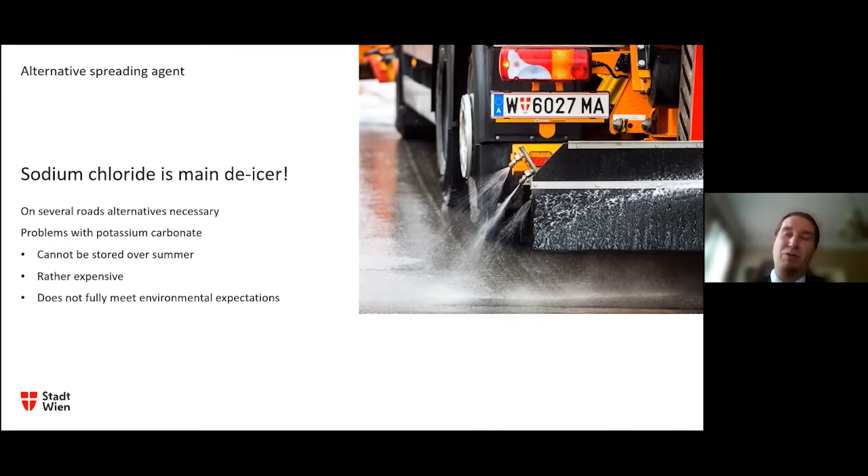So let's start. Sodium chloride is still the main de-icer we use, but there are several roads that need an alternative. Up until now, we still use potassium carbonate in dry form, and this is very impractical in some cases. You can't store it over summer, it's quite expensive, and it doesn't fully meet environmental expectations. So what we were looking for, this is one of the new spreaders, the liquid brine sprayer, and we were looking for something we can use with this sprayer. It has to be liquid, and as we're going from solid to liquid, we were looking for alternatives.

So we asked Vienna University of Technology to cooperate with us, and they did this as a diploma thesis. The project's goals were to find an alternative to potassium carbonate, to analyze the market and examine suitability, and to check the effectiveness of the product independently, because often you get products with big claims by the producer, but in the end they can't meet these expectations. It hasn't been the goal to replace salt or brine, because we knew this wouldn't happen. If we find something, okay, but we already knew we probably wouldn't find an alternative, and that's been true.

So what's been tested in the laboratory was thawing performance. We selected different spreading agents, and the first step of this project was to look at the market, what's up there, what can you use. There's been around 20 to 25 products. Then we said, okay, let's pick some of them and do further testing with these selected products.

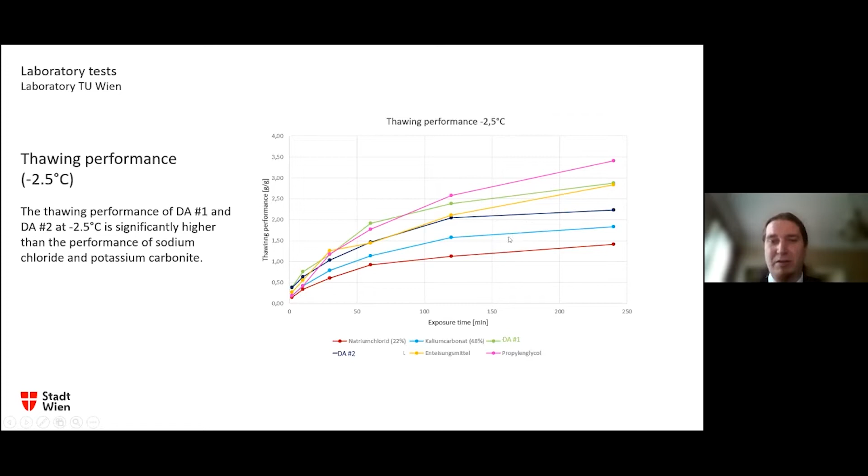The one graph showed only minus 2.5 degrees, which is a rather common temperature in Vienna for winter, but we tested it down to minus 10 degrees Celsius. You can see the lower the temperature gets, the less the difference between these two spreading agents becomes. After 2 minutes, 10 minutes, 30 minutes exposure, it's starting to thaw most of it within the first hour. Depending on temperature, within 30 minutes the difference is not so big. Afterwards, it becomes bigger, of course.

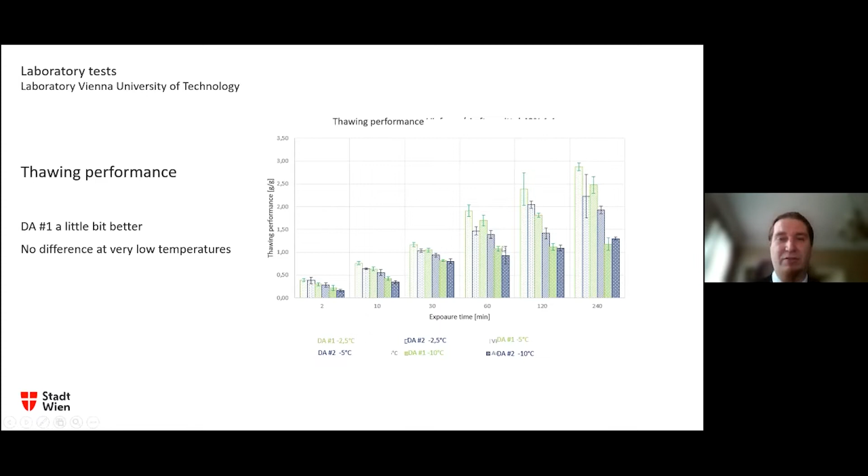So we know that it's working very good at the temperatures we have a lot. We also know that it works at very low temperatures, which can happen in Vienna - we might get minus 10, minus 12 degrees. So it might happen, and it works there also. Not that good, but of course sodium chloride is also not that good at these low temperatures.

Another thing we wanted to test before we spread it out on the road was the skid resistance, or the friction of the road. Does the spreading of these de-icing agents have a negative effect on the skid resistance of the road? This is a problem because we know from previous tests that there are de-icing agents that cause slipperiness just by spreading them out.

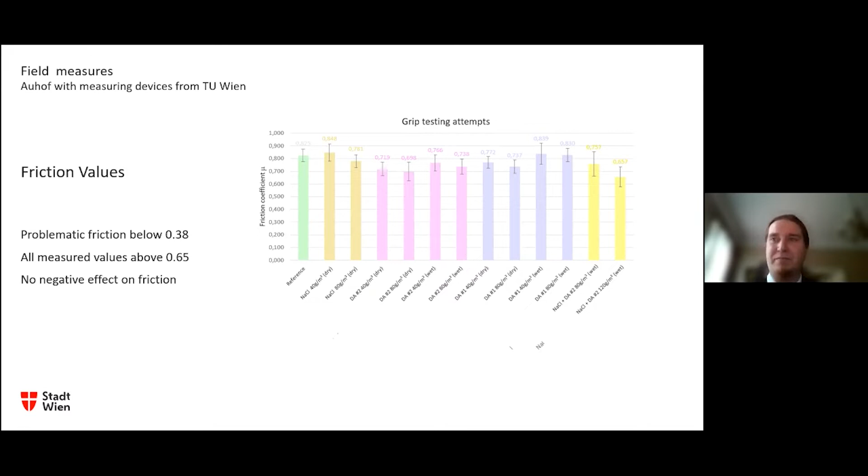What we started then, or the final conclusion of the tests from the laboratory, was: thawing performance is good, freezing point is good, friction is good, but price is rather expensive compared to all the alternatives we could find. For the environmental stuff, we couldn't test it because testing for environmental issues is rather hard, so we just used what we got from the producers, and some were good or others had no data, so we're not sure about all of this.

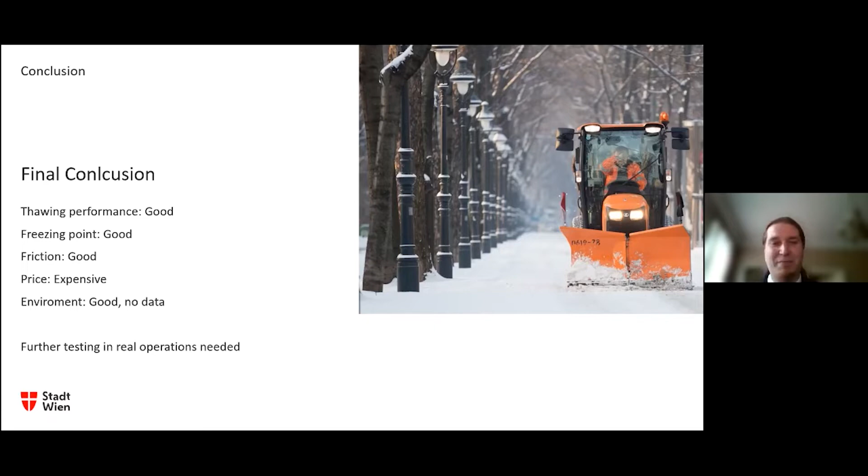But in conclusion, we tried it out on the road and it worked last winter. So we had our first tests in the real world, it worked there, but we still need further testing in real operations. We had some problems getting the de-icing agent in time last year due to a Corona lockdown, and they weren't allowed to travel into Austria. So this was a problem for us. We couldn't get enough material, but we sure hope that we will get enough chances this winter to test it out on the road as well. So thank you for your attention, and I hope I could show you how we try to find new alternatives. Thank you.

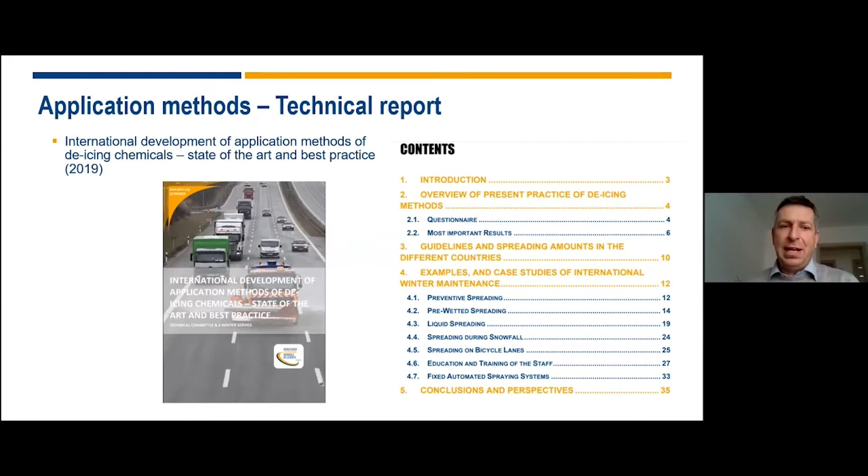We are looking for effective and reliable cars, of course low cost, which is quite hard to find, as the service maintenance costs are getting higher and higher for us, since we are not able to make self repairs as it was in the past. On the other hand, for the drivers, the comfort has been improved radically. Of course we have new technologies, we must add things like AdBlue tanks and so on. So very shortly, we are quite lucky that investments came into the technique for winter service.

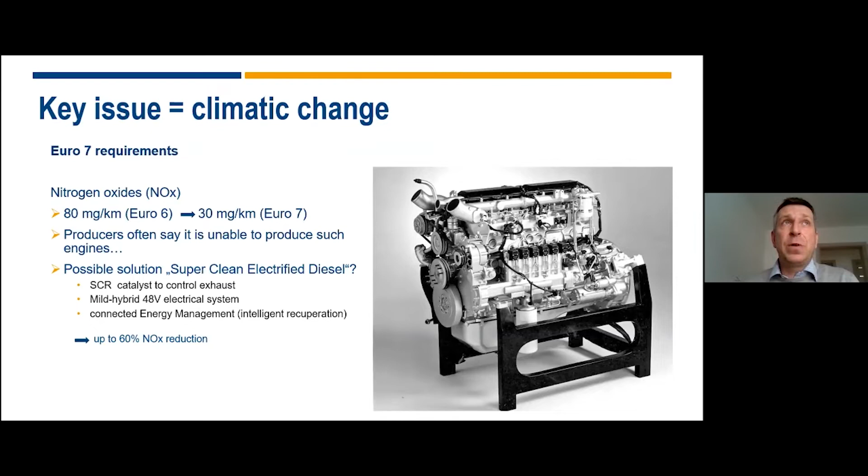And we are quite hard fighting with the environmental offices, as they don't allow us to use salt or any other de-icing materials, with the exception of potassium carbonate, which is used somewhere. This is what our agency solves at the moment now. And of course, it's got something to do with economic efficiency as well.

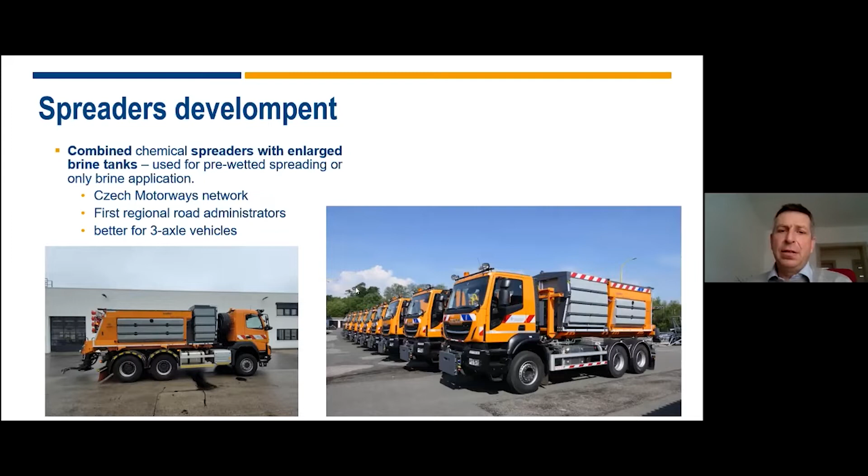We know that it's better to use them on 3-axle vehicles, as the capacity is bigger. The spreaders are divided into two parts, one for solid salt, and the second for the brine, and the ratio is usually half and half. It can even be more brine, up to 6,000 liters.

And they are very good with the working parameters. As you can see here, the spray width up to 11 meters is good for the motorways as well. There are two different parts of the Jet or the Spratronic system. And even more important for us is also the speed. We can use it up to 90 kilometers per hour. It was not so usual in the past.

Brine dosage, it's quite clear. We have good controllers for the drivers, so they really can check and control the measures of the brine and of the salt. So this is one of the things that we are quite lucky to bring to our roads.

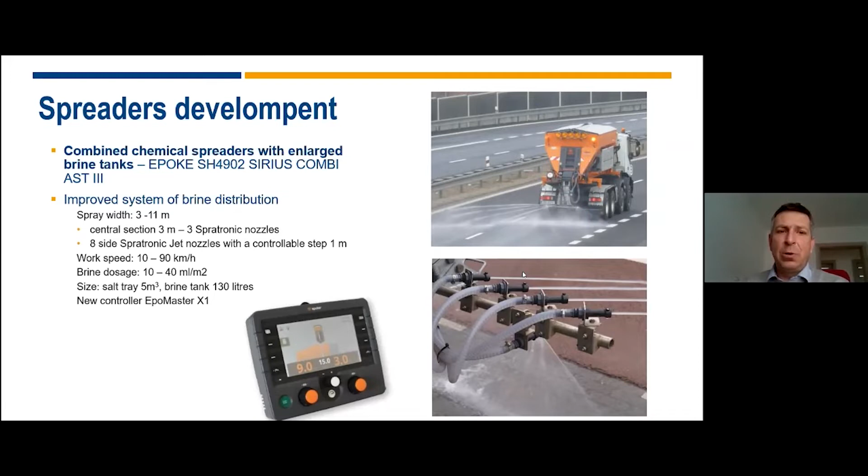Anyway, generally we are focused on flexibility of the trucks. I mean, they must be used all over the year. One car must be able to carry different superstructures - I mean water tanks, so sweepers in summer, and of course these spreaders in winter - and the exchange of the bodies must be very fast, must be flexible. This is what we really need from the cars.

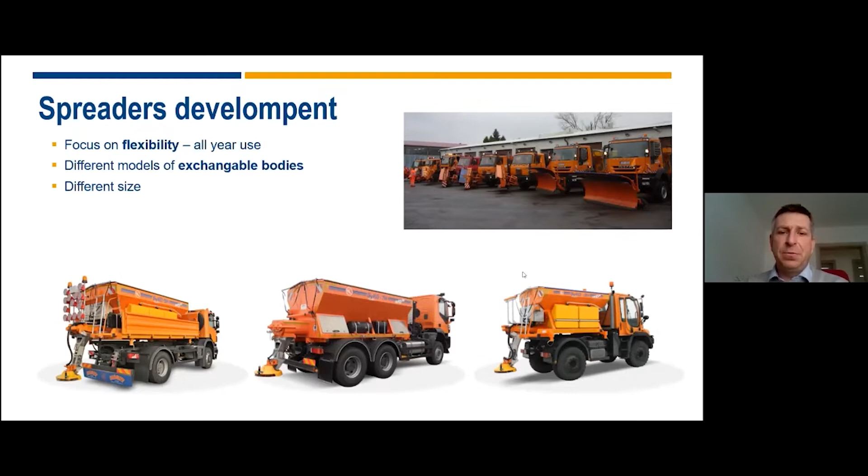I have a second part of my presentation, something different, and it's got something to do with Ukraine, which is my favorite country, and we have many friends there. It comes from history, from our relations with especially the Western Ukrainian regions.

We still have good and official relationships there, and one thing that we do is instead of throwing our older technique to the wrecking yard or somewhere else, we send it to our friends in Ukraine, and they are quite lucky to have it, even though this is older technique from the 90s or even the 80s. It's in good condition. It's very robust, very easy to repair, and it's not very sophisticated, but on the other hand, each driver, or almost each driver, is able to repair it on the road.

And we have this agreement that we can send them to our friends and they use them there. I hope that they are still in service.

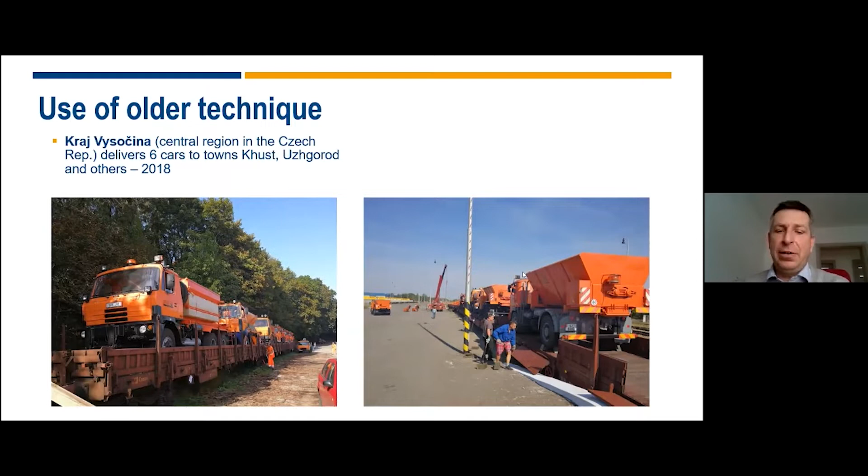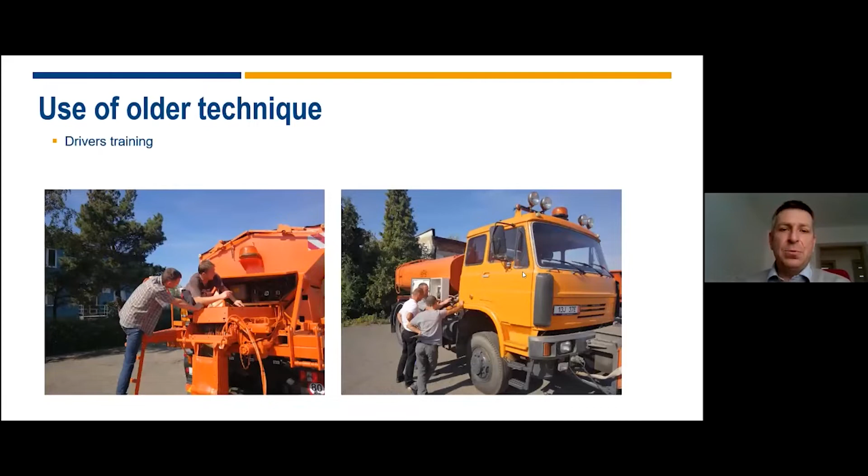We made some driver training. So I got for each car one of my drivers, and guys from Ukraine came as well. It was a good meeting there. And these are pictures - the right one is from Khust, it's definite.

The left one perhaps from Uzhgorod, I'm not sure, but they are in service there. And a similar thing has been done later from the South Bohemian region, 2 cars to Kolochava, which is again a town close to our history. It's not about some gifts, but I think it's about friendship. I'm glad to know people in Ukraine, and they are really good friends for us. They come quite regularly, and I hope that it will go on.

So I got, we have 3 minutes after half 2. 2:30, so I got the time okay. If any questions come to me, I'm ready to answer.

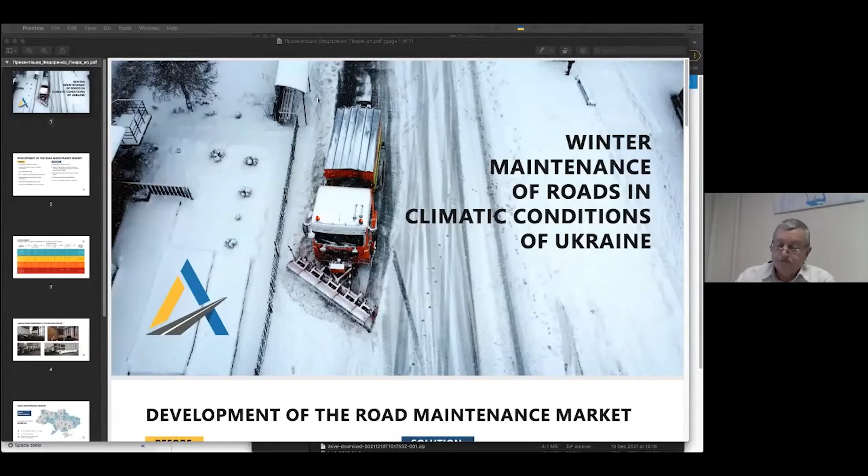Due to the program of the Great State Construction, new cement and concrete roads were built. The calculations were done by a Ukrainian institution to show that cement and concrete roads turn out to be 40% more efficient compared to pavement with asphalt. On the 5th year of operation, roads with asphalt require their first fixing, while cement and concrete roads need fixing only on the 20th year of exploitation.

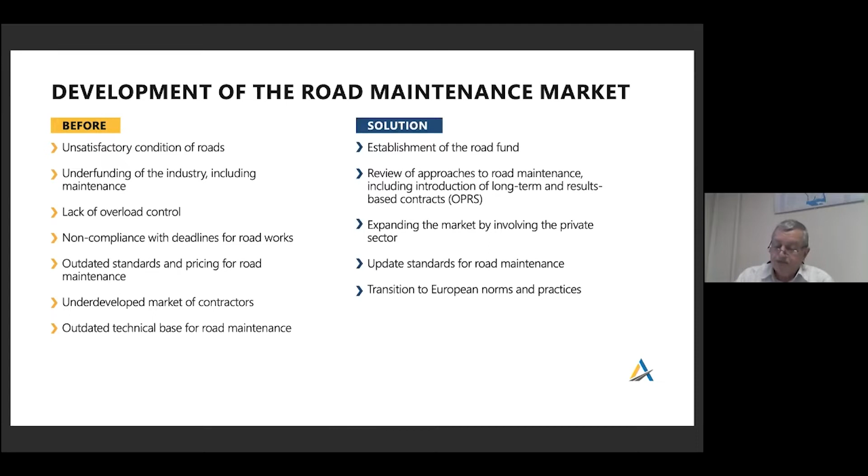So it's lighter during the winter time and has better traction, and so the braking distance is shorter. So we have new roads.

This is why we don't use abrasives. We only use saline solutions. We have recommendations by the National Research Institute from 2019. However, they are very controversial. On page 5, there's a description of de-icers. It says that de-icers can be used, including inhibited chloride anti-icing materials.

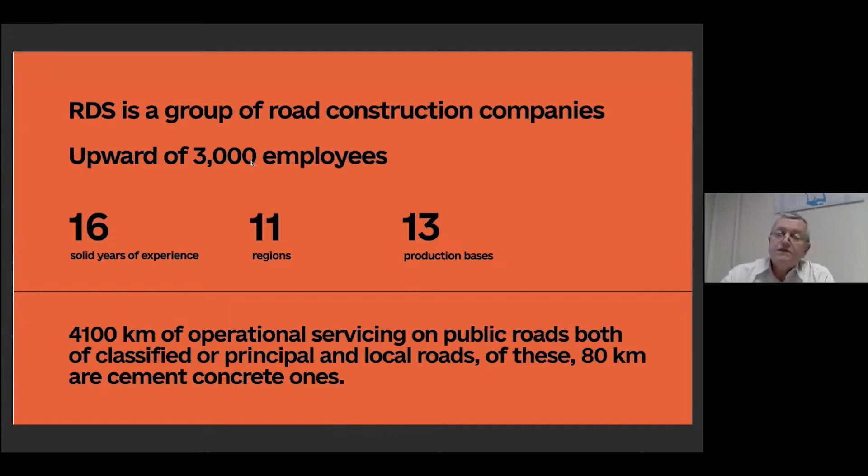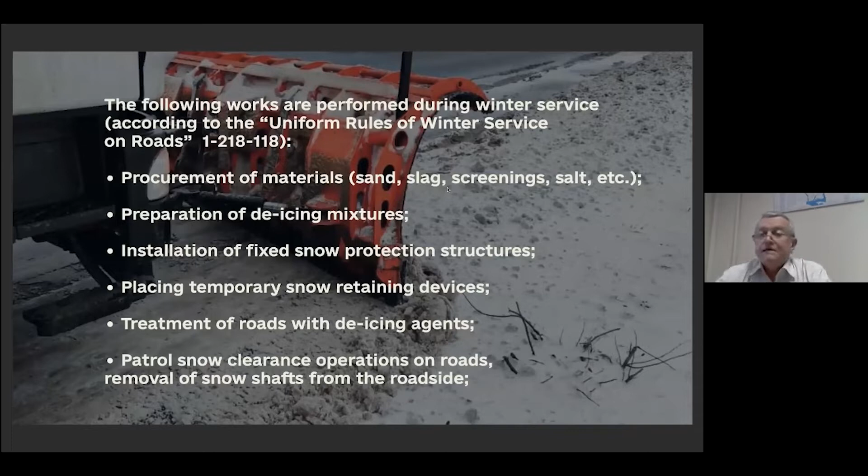Another issue I have is related to additional tracks from the fields leading onto the roads — additional roads that lead to the fields. Right now we have conflicts with different agricultural companies who take their produce from dirt roads onto the M15 motor road, and we spend a lot of time cleaning it from silt and dirt. So I have issues with that.

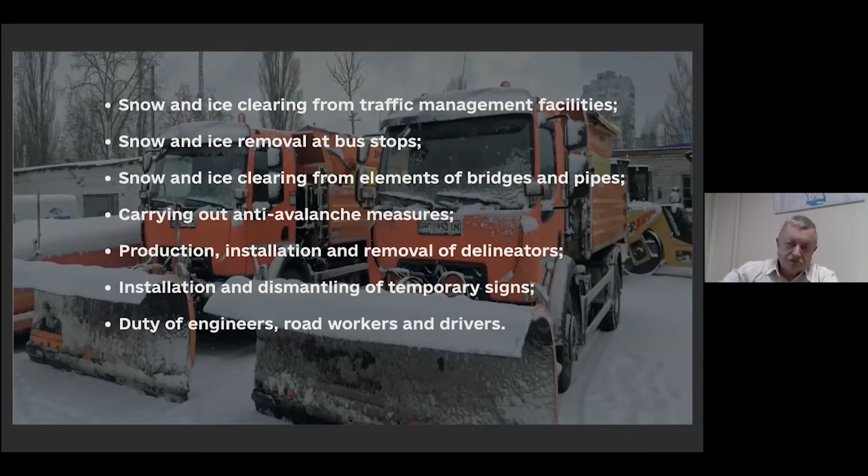So I have questions for Ukravtodor and the Ministry of Transportation. They need to insist that farmers actually place hard pavement on the dirt roads for the first 100 meters of the roads that lead into the fields. This will help prevent dirt from getting onto the motor roads of national importance. This is very important for Ukraine in general. Thank you very much for your attention.

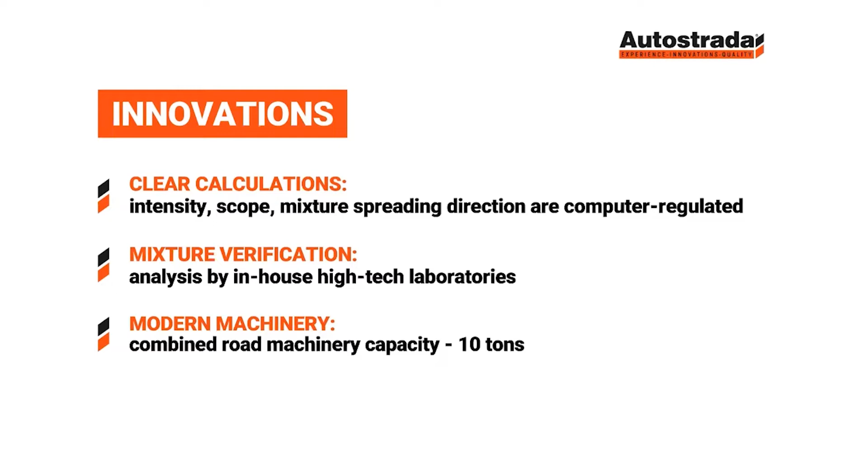Of course, our goal is the result we're trying to attain as we maintain the roads. The good result for us is safe traffic. We can use different technologies of de-icing, like saline solutions and chemical reagents, which can extend the time and effectiveness. However, we work within strict regulations, and our capability to test new technologies is not that big. So one important factor for us is making sure our fleet is sufficient for proper performance.

Currently we have over 60 units for winter maintenance. All of our trucks are either Ford or MAN trucks, and the de-icing agent spreaders are usually of Polish or Turkish manufacturing. Currently we service international traffic routes and regional traffic routes - those are the contracts that we have currently.

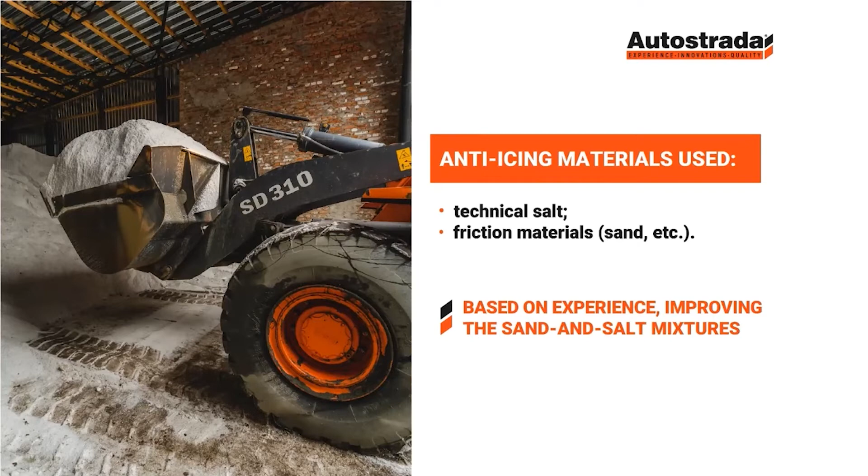Things we would like to change or see new in the winter maintenance system revolve around two things. First is transition to longer term contracts of winter maintenance, which will help us plan with higher efficiency and effectiveness in the long-term horizon. When we understand the long-term horizon, we know how to buy machinery and modernize the storage bases and such. The second thing is, for us, it would be nice to have implementation of build and maintain, where the road building company is responsible for maintaining the strip of road it has built. As we build the roads, we provide a guarantee for the pavement, and we're really sure of the high quality of the pavement. However, if maintenance is not done at a proper quality level, this will lead to lack of timely repairs because the company is not responsible for the road. So where the same company is responsible both for maintenance and construction, this will improve the quality of roads, which will provide higher convenience and safer traffic at any time of the year.

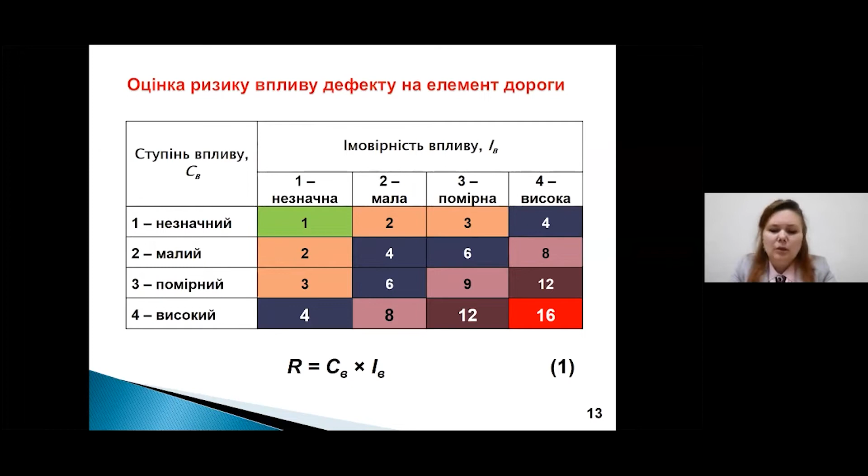A new notion was introduced: the risk of the defect impact on the element of the road. So it is now determined for each element of the road. The priority for defect remediation is given to the defects that impact the safety of traffic.

For us, this is also a principally new category, which in principle is already available in the foreign experience.

As already said, the levels of motor road maintenance were classified under the levels of maintenance. The main classification does not contradict our regulatory framework and is contained in the acting state standards and provisions in Ukraine.

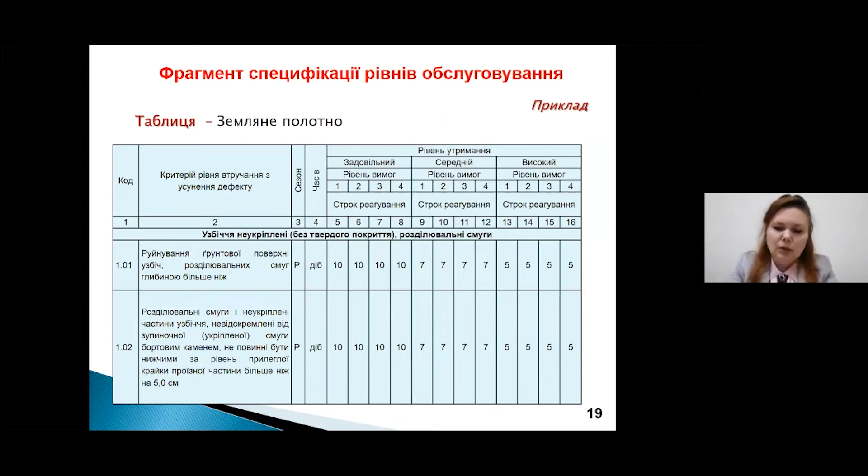Parameters for the OPRCs under these state standards that were developed, adopted, and implemented include the full set: the composition and the length of section, the duration of the agreement, and the maintenance level, expected cost of procurement, and daily fixed sum.

Sums for works that are going to be carried out once the OPRC is established, and the number of penalty scores for exceeding the deadlines under the OPRC, and also the cost of one penalty score that is applied for failure to keep the level of the road.

Therefore, the types of long-term agreements were established. This is a comprehensive OPRC that includes all of the scope of relations, and specialized OPRCs, for example, for a certain section or for a certain element of a motor road.

Also, the subject matter of OPRCs was classified into two classes. The first class is the section of one motor road or sections of several motor roads, which is the network approach, so to speak.

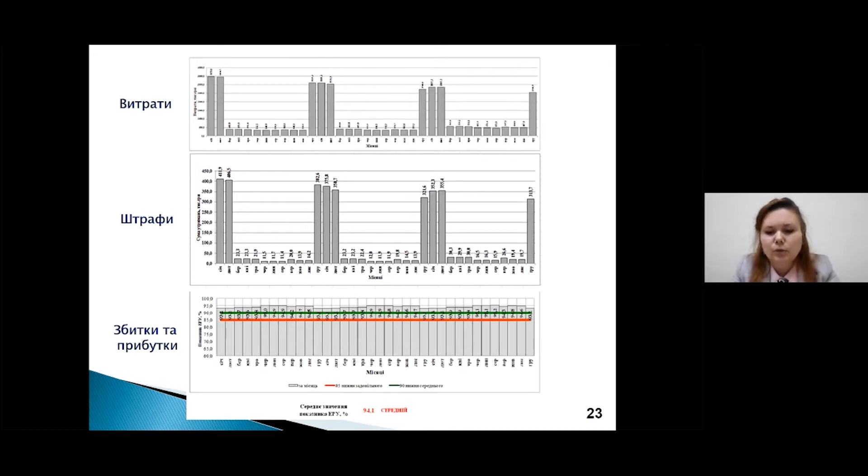Here we see that according to the results of modeling, we can approximately forecast what these expenses, possible penalties, profits, and expenses are going to be, according to the levels of maintenance.

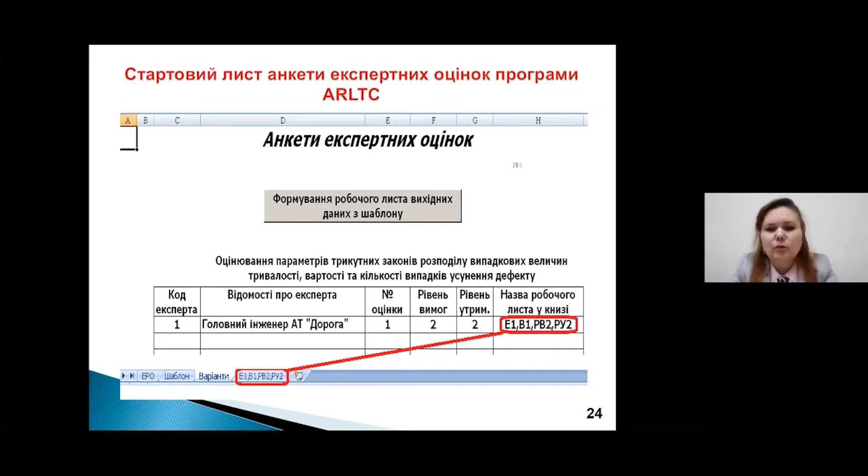The expert evaluation from experience allows determining the level of requirements at certain sections by means of questioning the experts who were carrying out the works at this particular road section. Therefore, we carried out the modeling, and as a result we have 3 regulatory documents for our sphere of economics, and we plan for the future to work towards substantiation and the draft of OPRC according to the long-term principle that is based on performance.

Thank you for your attention. I am open to answering any questions that you might have. Thank you.

Thank you, Professor, you're right on time. For those of our listeners who are not familiar with Ukraine, let me add that OPRC contracts are pretty rare and new to Ukraine. We only have one case of such a contract being used, by the Lviv road agency in the western part of the country. This contract has ended recently, and we are now in the process of prolonging it. But it is of utmost importance to the Ukrainian government to set up the legal framework for these contracts to be implemented on a regular basis across the country on all types of roads.

If there are no questions, let me pass the microphone to Stanislav Gvozdikov, who is Deputy Director of the Scientific Road Institute. This is the institution that deals with standards in the road sector, where it also provides research and all the relevant scientific work associated with roads and their maintenance. So please, Stanislav.

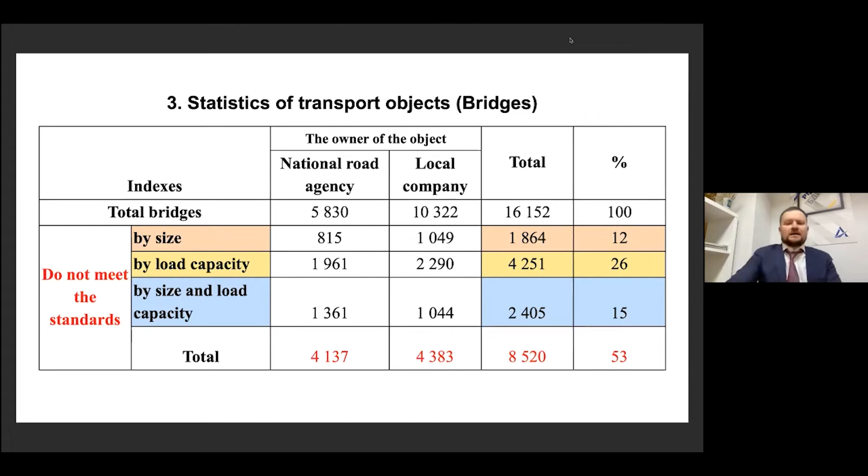So Ukraine has the highest cost per kilometer of maintenance. This is a personal conclusion, because many times we irrationally use the available money from the budget only to be able to sustain and expand the service time of highly degraded infrastructure objects.

Let's go to the next slide. This slide contains information that I wish to share with my honorable colleagues, whose ideas and recommendations will be noted and used in daily work, because we, the Ministry of Infrastructure, have the task of greatest liberalization of the market, and so we need to promote new players of road construction to come to the market.

We need to increase the competition capability of the infrastructure product. We need to implement world renowned practices for complex infrastructure projects. I'm talking about EPC plus F methods of work, implementation of a project implementation scheme where you design, build, and operate. Using this Gold Book in the changes in the legislative base, everything related to making these goals practically attainable will be very important for us.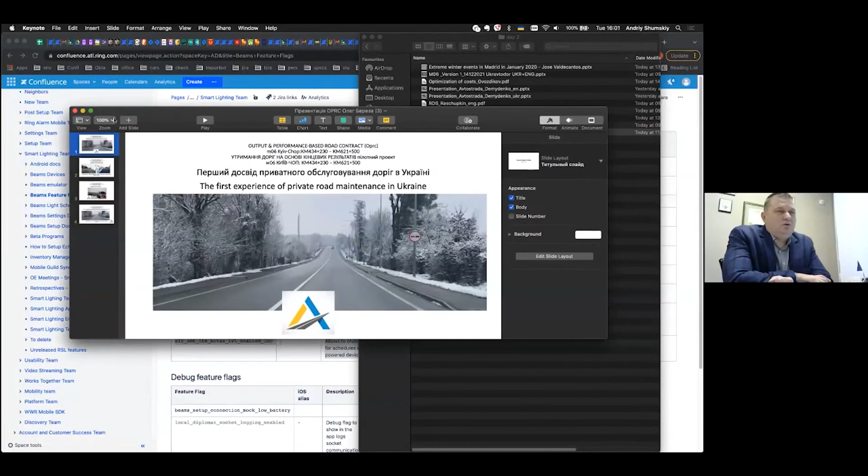So in 2014, from the Lviv and Rivne border to Stry, we had zero serious changes. And this road, based just on the protocol of servicing that was enacted to implement this contract, we were able to maintain. I believe it will be serviced until those changes with regard to the M06 road are enacted.

I think it will still remain in very good condition. This part of the road, M06, is one of the arteries both for Lviv region and for Ukraine in general, since it connects the utmost western borders and the center of Ukraine. For us, it was a high priority to keep this road in well-serviced condition.

Definitely, we had paid great attention to the challenges related to servicing. And so this contract of attracting a foreign company, including the engineering company, had actually turned out to be a very fruitful company.

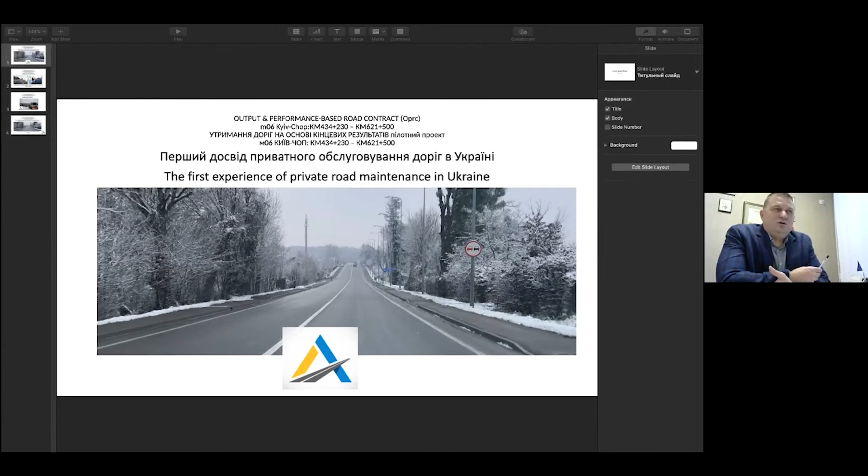They were performing the technical supervision, and it was very important as well. So this was the third involved party that was helping the mutual responsibility of all parties. So the client was laying down the rules, and the engineer was actually supervising, and the maintenance was done by the contracting company.

So it was very important for us to see what was happening with regard to payments. The payments were evenly distributed, but the result had to be maintained on high levels. So the functions were very important for us to understand what we are aiming to achieve.

This is why the engineering company and their role was crucial. They were performing supervision, and then, if necessary, actually penalizing the company. So therefore, we obtained a very good result, regardless of the weather conditions.

So we had, sometimes even in preventive ways, performed measures necessary to maintain the road at a good condition. It was specifically related to winter maintenance, because this region of the country is very susceptible to changes of weather, where from the Carpathians we have different abrupt weather changes, and so it has played a very big importance.

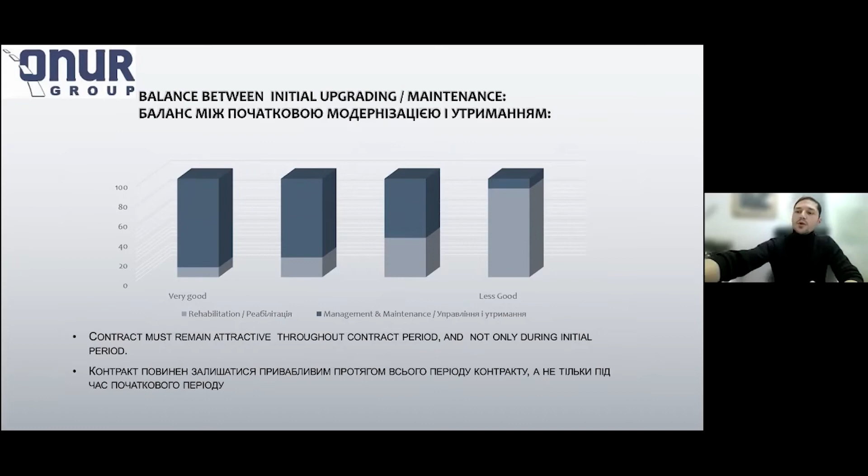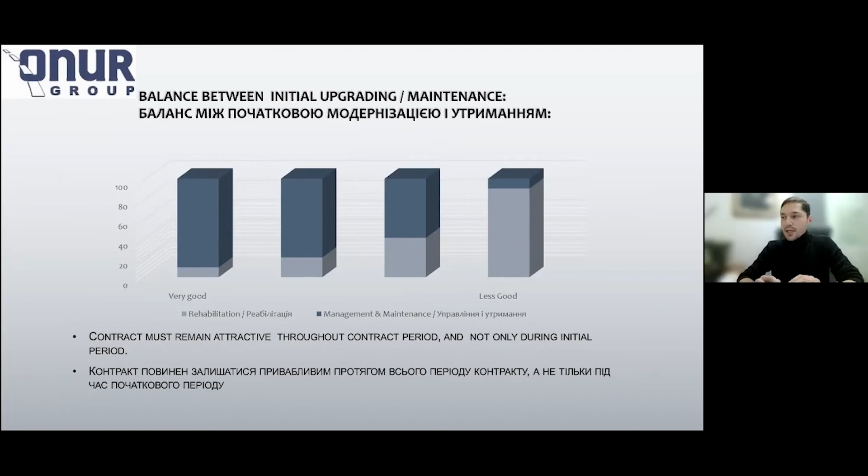As you can see on the presentation, if the rehabilitation works are not big, the management cost is really big. If the rehabilitation works are more than 60-70%, the management and maintenance cost is really low.

Let me talk about service levels and specification. Specifications included in the contract describe a level of service expected for the road. The road should work, that's our main idea. Level of service is defined in terms of usability, travel speeds, road surface conditions, safety features, roadside assistance, etc. The contractor has to ensure that road users get a certain level of service.

Service levels are set for the following: road open to traffic, emergency incident response. For every accident, the contractor goes to the accident site and does all the works needed. Road pavement, unpaved shoulders, drainage system, road signs, road marking, safety barriers, highway lighting, traffic lights, landscaping, cleanliness of surface, bus stops and road toilets, and structures.

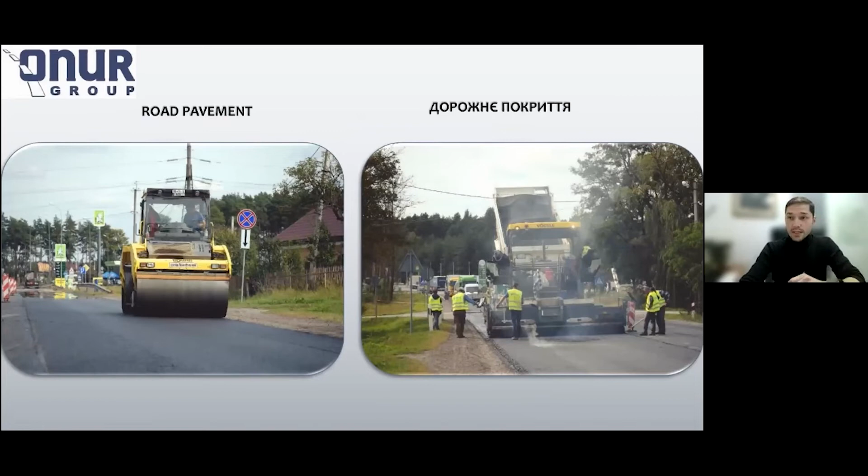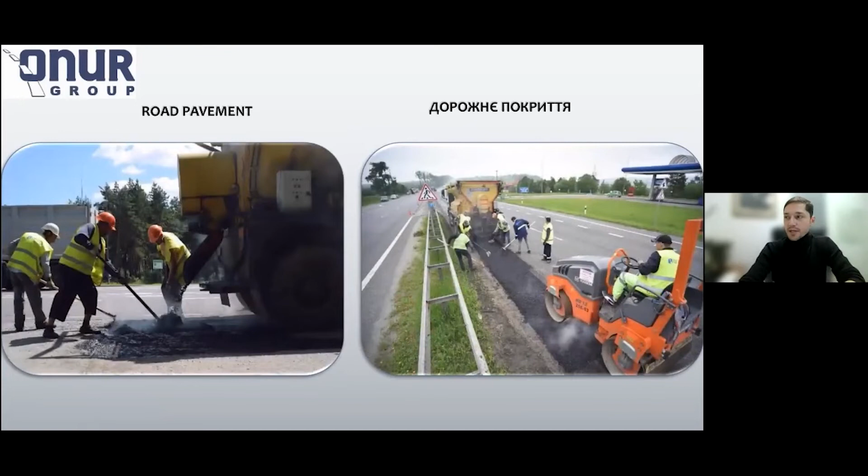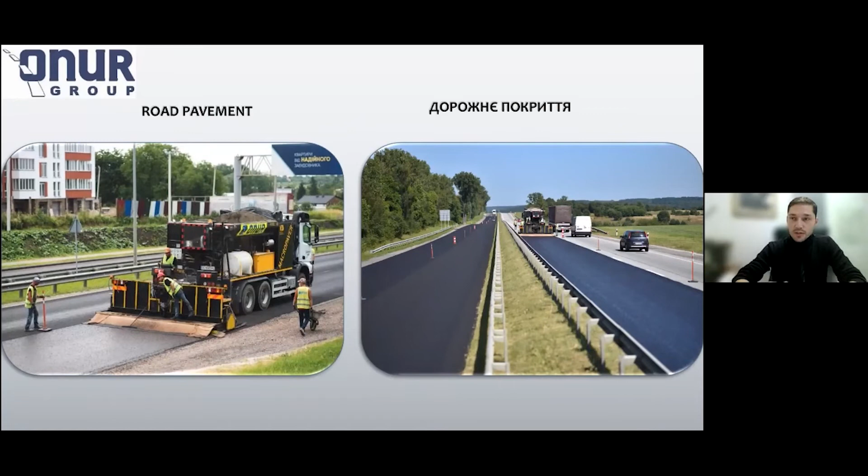The first and second year of our contract, we made a lot of improvements and rehabilitation works, like crack sealing works, patch repairing, slurry seal, and microsurfacing pavement. It is really a new technology for us—not new technology in general, but the M06 was the first place where we did it, using special techniques and special technicals.

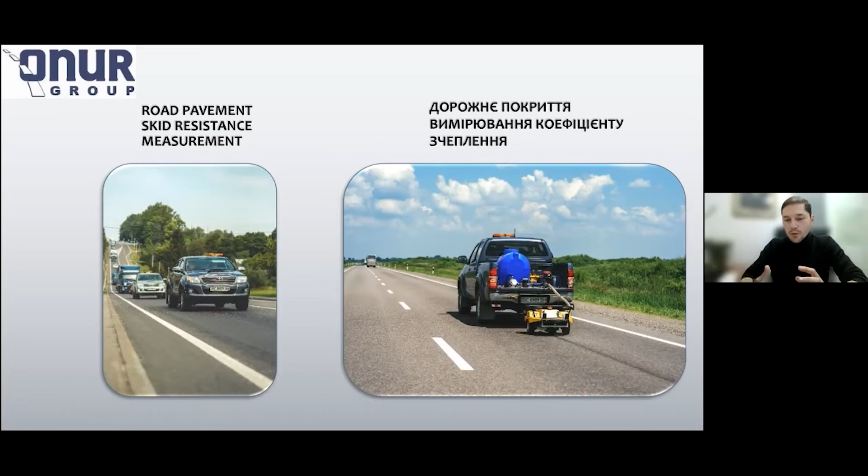Also, I want to add road pavement skid resistance. We made skid resistance measurements every year, two times a year. After this skid resistance measurement, we decide where we will do improvement and rehabilitation works, or slurry seal works with pavement. As you can see, this is the special equipment for the skid resistance measurement.

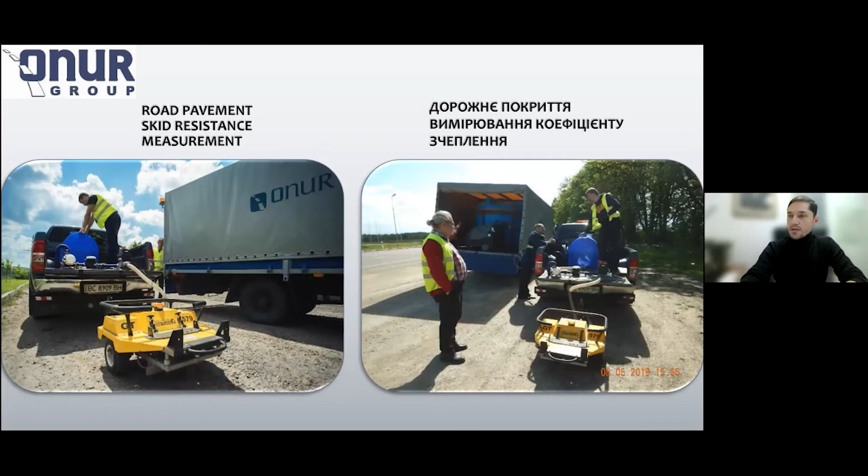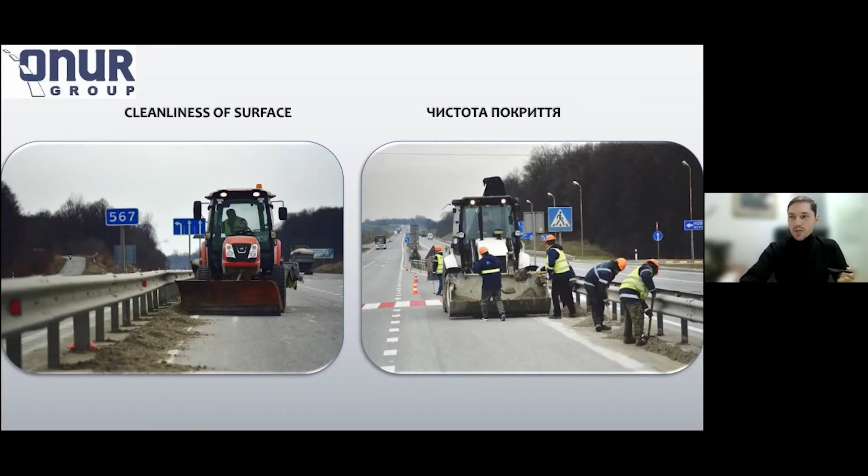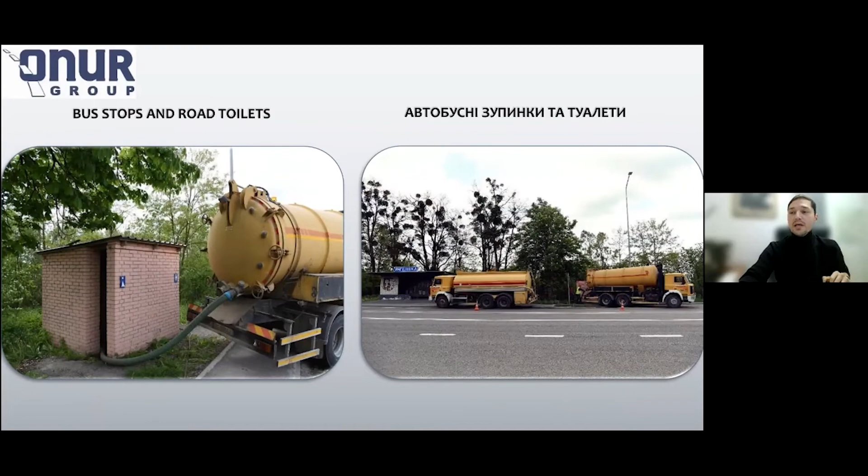And also it's a little bit different photograph of our works. All of the toilets at the bus stops are periodically cleaned. Also bus stop repairment, surface concrete surface repairment.

And the second criteria: traffic safety. Road marking and traffic signs, as you know, must be visible and without damages. Safety barriers without damages, traffic lights, and emergency incident response.

After every accident, we engage with the police and ambulance and road users calling us. We set up the temporary traffic management scheme, secure the site, and sometimes we were faster than the police and ambulance.

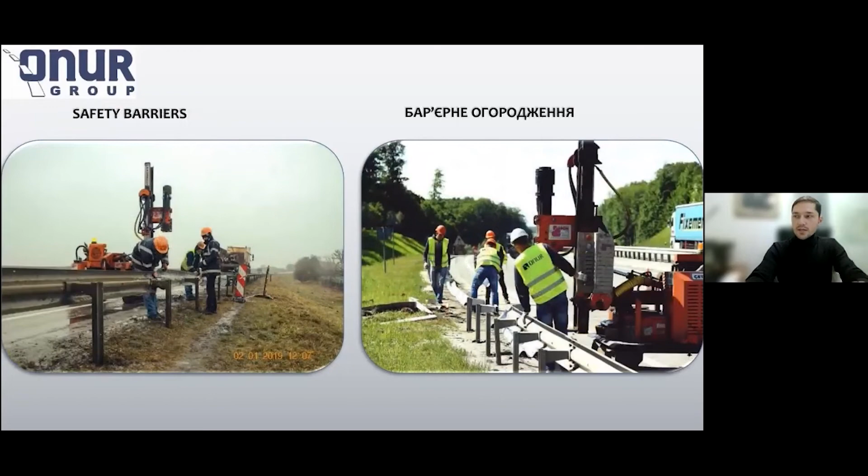Road marking works, also demarking. Safety barriers after accidents, pedestrian safety barriers, traffic lights, and emergency incident response.

Every accident, we made reports—we report to our employer. All of the accidents are collected, and every month we share our report with the employer.

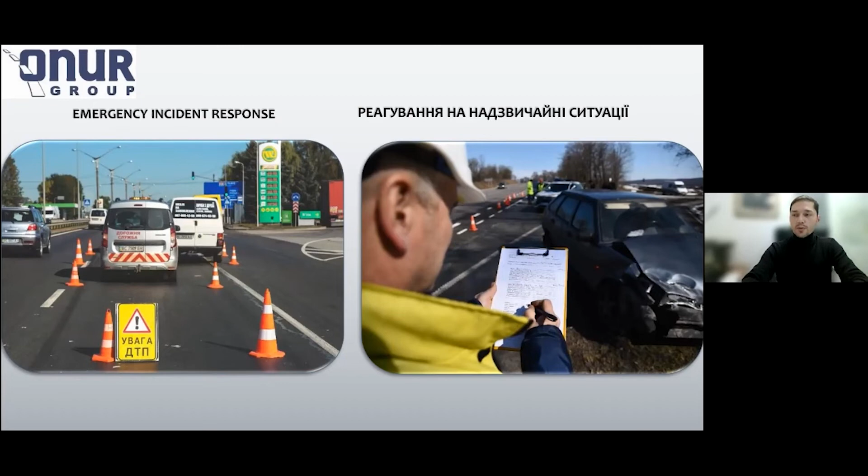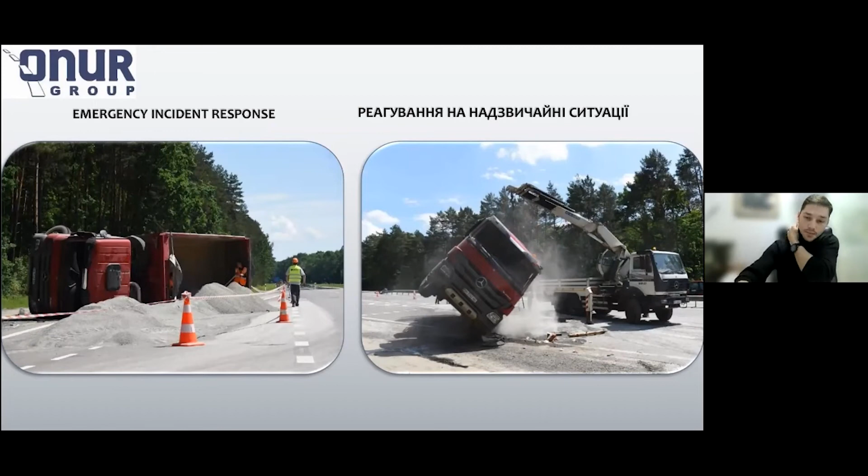After accidents, we clean the accident area. Every accident, we should react. And daily, emergency inspection: 24 hours, 7 days, our teams were on the road doing their daily routine, inspecting the road, and our call center reported to police and employer if something happened on the road.

The third criteria is the durability of the road: landscaping areas and vegetation along the road. For example, grass height in our contract—according to place, more than 25 centimeters or more than 50 centimeters is not allowed. If the grass is more than 25 centimeters high, we should cut it. If we don't cut it, we are punished.

Drainage and culverts must be free from damages. Structures and bearings must be complete, intact and lubricated. Expansion joints must be present, intact and clean. Concrete elements must be free of cracks and damages.

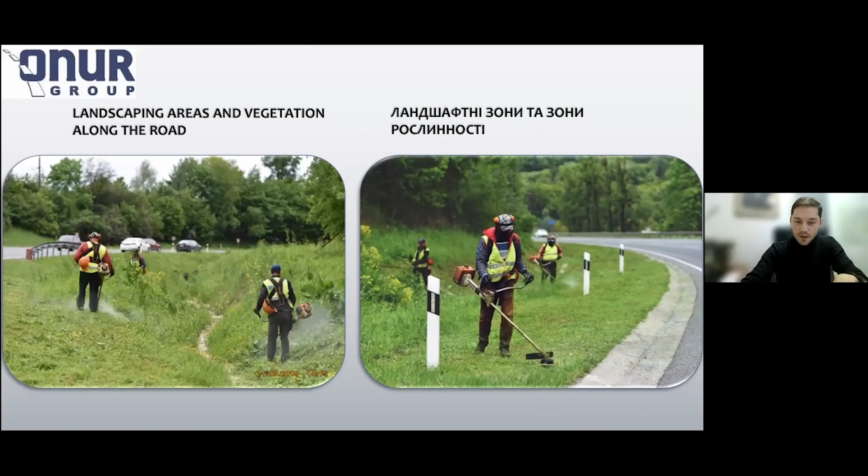As you can see, in our Lviv region the grass grows very fast, but every day we cut this grass and keep it less than 25 centimeters.

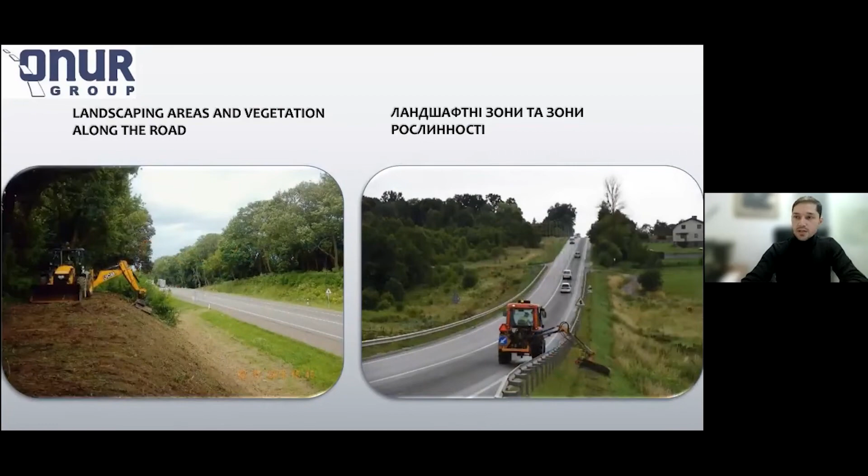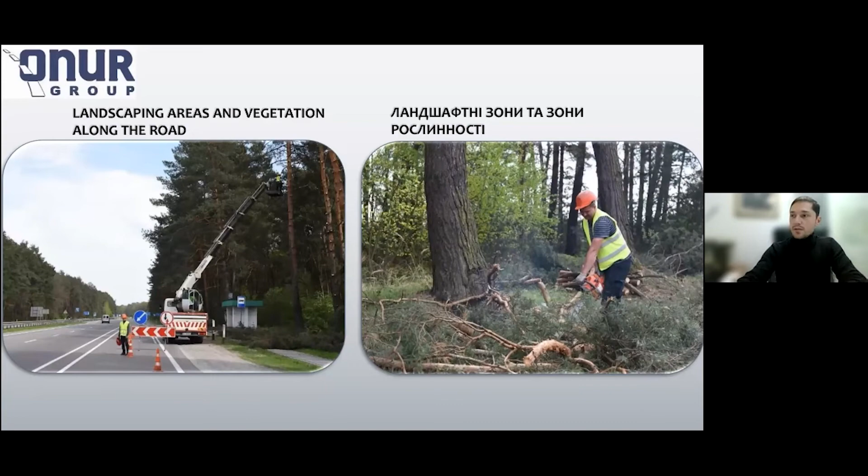Special technicals we included in our works: little minor tractors, little equipment, special attachments, cranes for cutting emergency trees, and collecting the rubbish every day. Routinely we collected the rubbish from the roads, and I can tell you about this one—it's hogweed.

Hogweed is a really dangerous and poisonous vegetation. We worked with it because in the Lviv region hogweed grows a lot. We bought special equipment and special chemicals, and every year at the beginning of the season, when it is not growing much yet, we pour this special chemical and work with it.

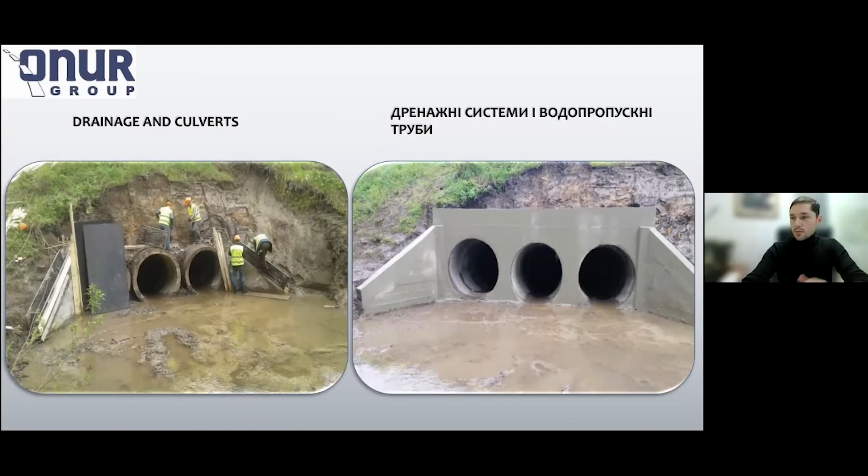Drainage and culverts: if something happens to the drainage, we renew the whole structure—repairment, cleaning.

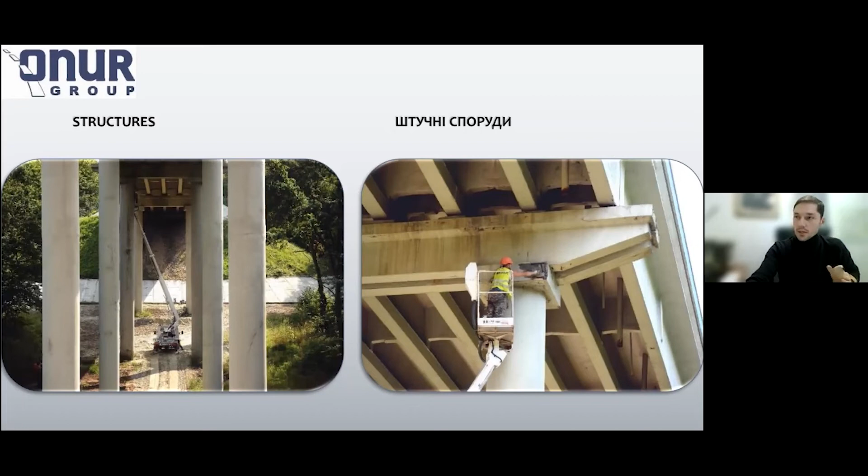Also with all of the bridges, monthly, every month we inspect the bridges for defect collection or defect decision, and if there are any defects, we quickly liquidate them.

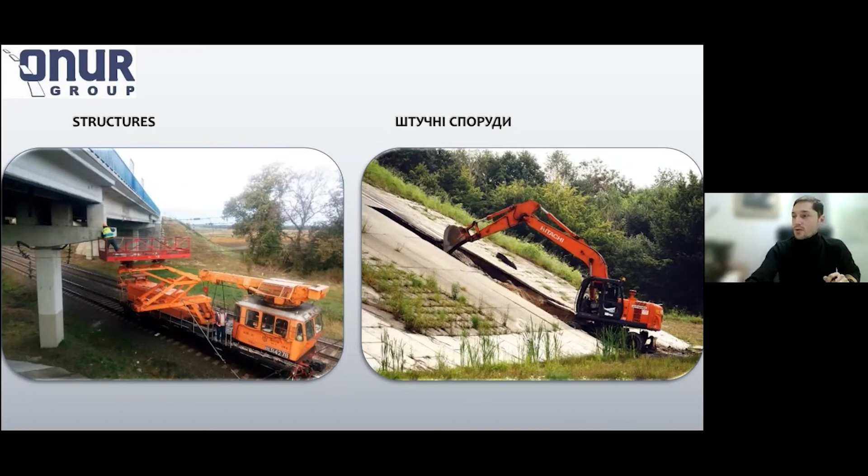And we include some other technicals also for our works, because there are train rails, expansion joints, and the criterion for winter maintenance.

Carriageway, other traffic lanes and side roads, footways and pedestrian zones: the carriageway must be without snow, snow sleet, snow slush or ice within 2 hours after precipitation stops, and other traffic lanes and side roads within 4 hours after precipitation stops.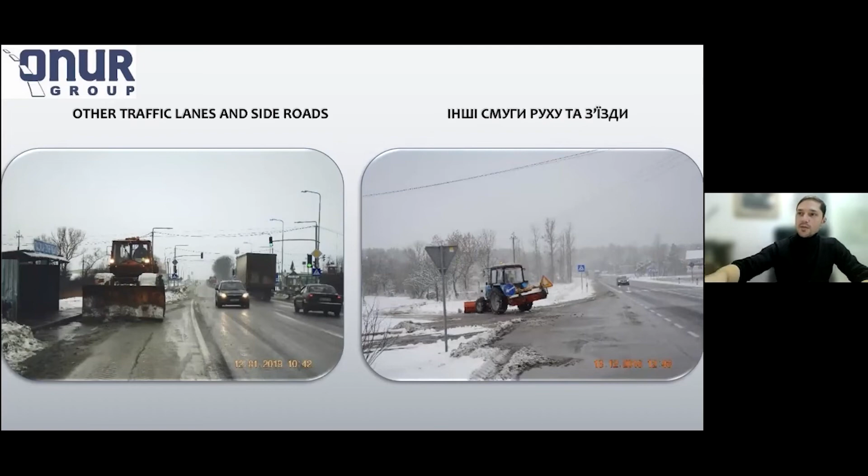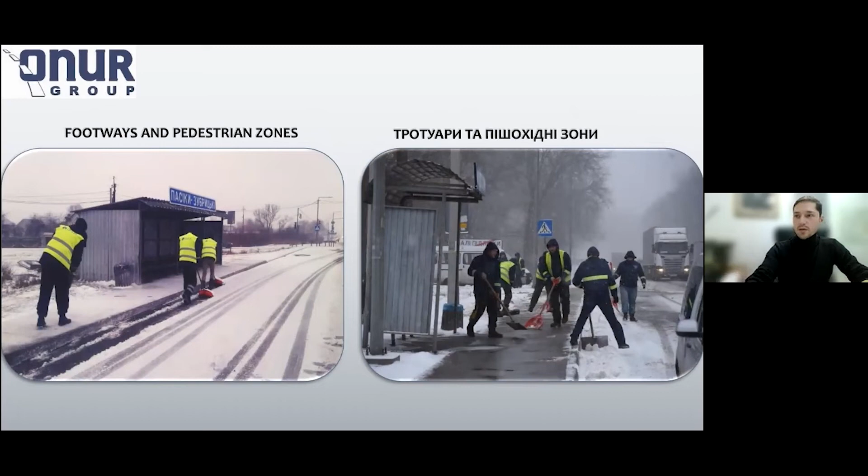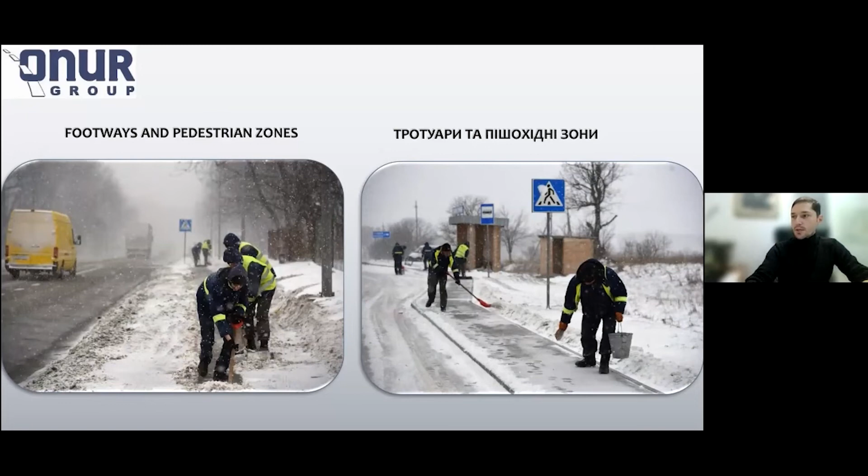As you can see on the photos, all of the bus stops are cleaned manually. Pedestrian zones, footways, all of them are cleaned manually, with brushes and small technical equipment.

We also cleaned all of the drainage systems after the snow, because if we don't clean the drainage system, all of the water will collect, and it will be dangerous for road users.

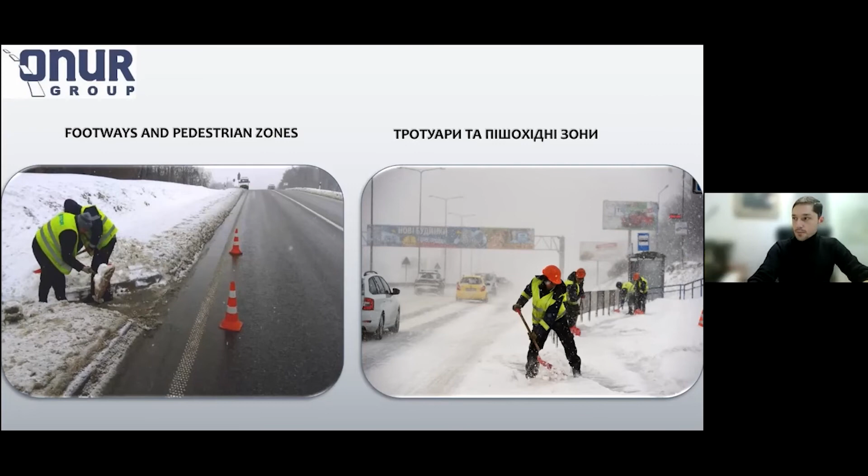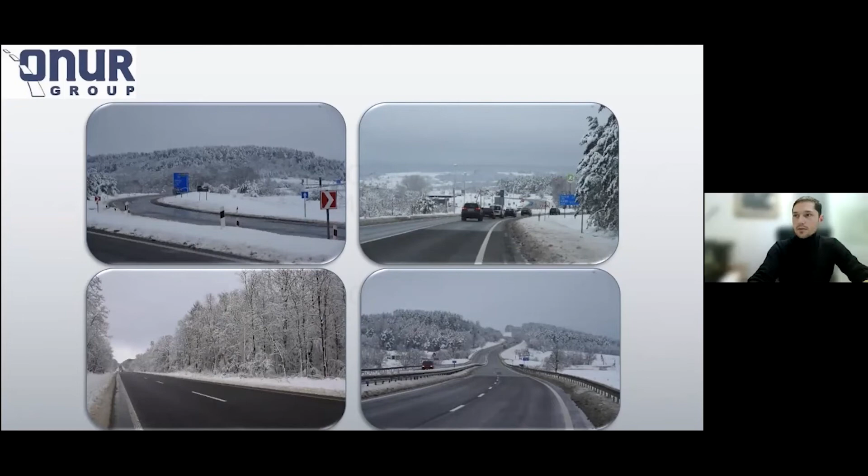Tolga, you're running a little over the time limit. Can we please wrap it up? So, because we have some time constraints, our management information system is finishing up.

The management information system is our system for daily inspection and defect decisions, and after that, if there are defects, we open an NCR. The NCR is automatically calculating, and after that, if we don't close the NCR, we get punished.

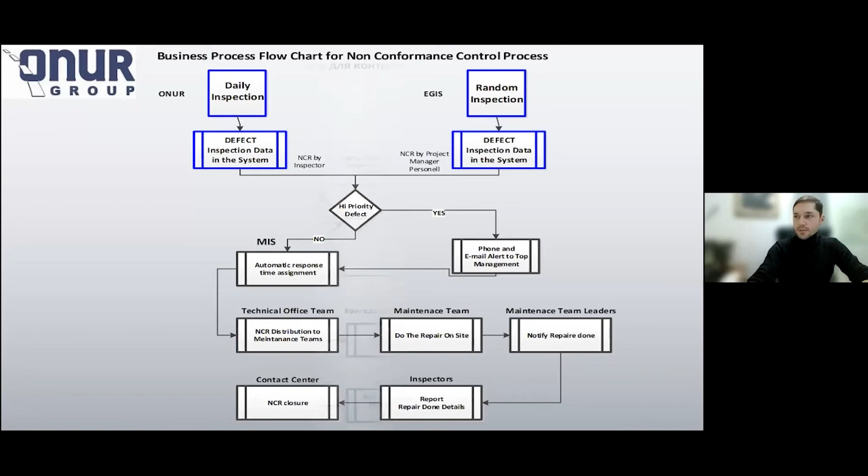Every point relates to one of the defects - opening the NCR and opening and closing the NCR. And the call center, we have 24 hours, 7 days a week.

Thank you, Tolga. It was a great presentation with lots of details, lots of pictures that show your daily work. As an end user, using this section of the road many times, I can say that it's always been in good condition.

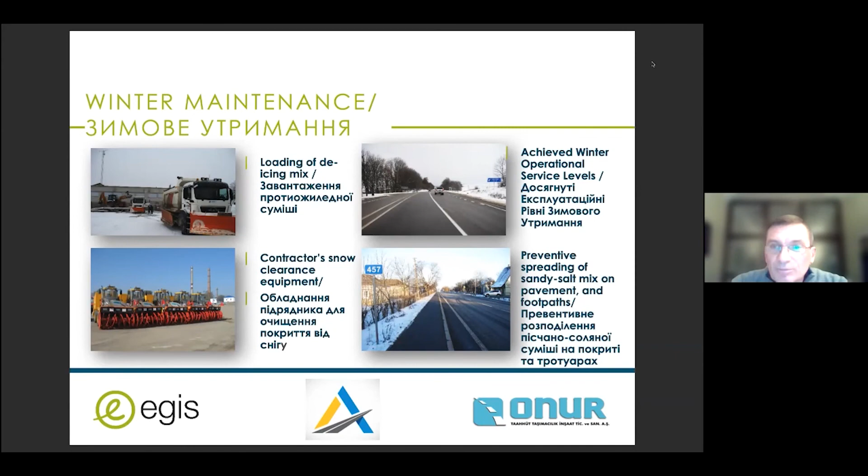So these projects, I believe, are very viable, very successful. This pilot project proves it. Thank you very much.

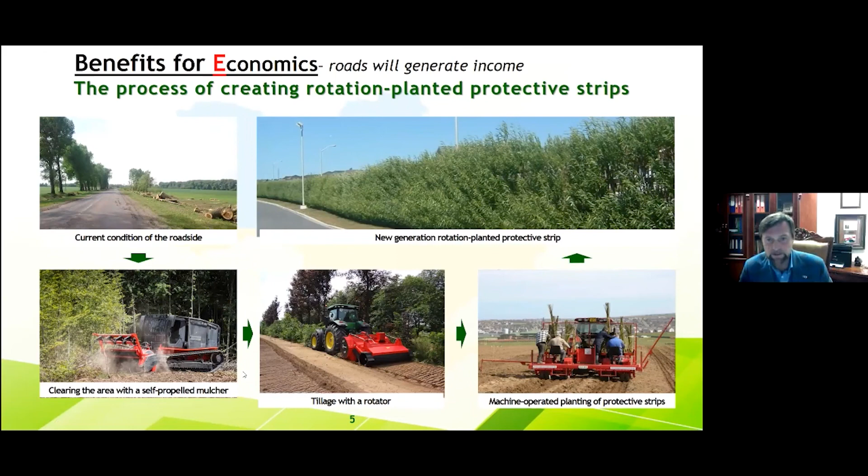Unfortunately we cannot see the slides. Please flip through to the next. Can you see my slides? No, unfortunately. Hold on a second, let me share. Yes. So the machinery that I've told you about, I can leave my presentation in the shared folder.

With regard to snow, together with the Institute, we have calculated that if we create such vegetation, rotationally planted, we will be able to cut it. You can see here the 2 lanes - we will be able to cut with special machinery once every 2 years.

So you will see both first high growing vegetation, then bushes, then small vegetation. So every year we will have 3 lanes, like trees, bushes, and small plants. What will it provide? Due to high compactness, about 70 centimeters apart, we will see the shape of the snow like this.

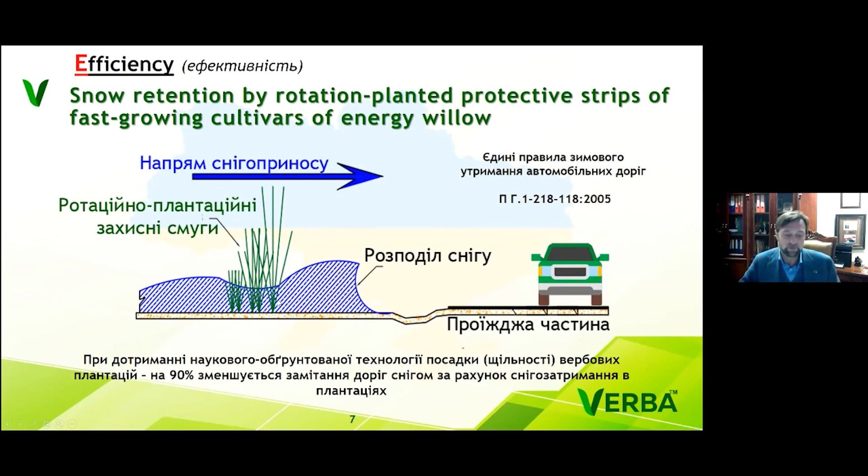This is very natural, very potent protection from the snow. We need to calculate the distance from the road, and this forestation will function like this. These plantations can work for 60 to 70 years, especially if we have big trees planted around the road. If a car hits one of those trees, there can be a lethal incident.

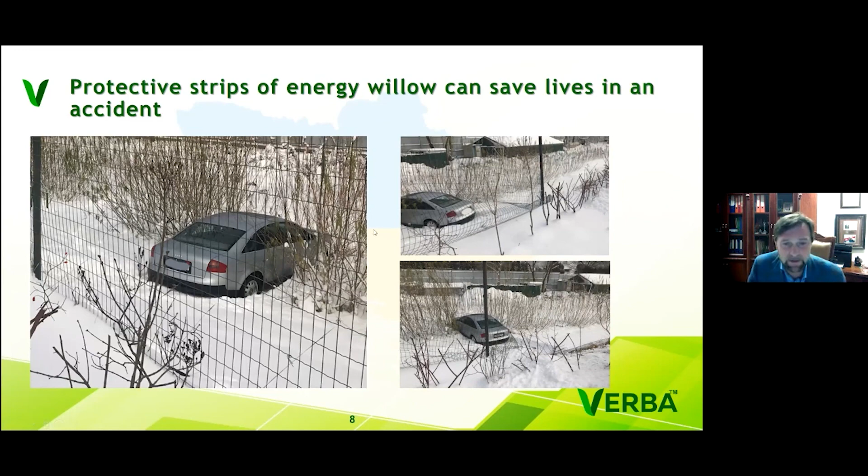You see the existing forestation that we have actually practiced planting for several years. You see the car accident - the car was almost unharmed because the bushes grow no higher than 60 centimeters tall.

With regard to the scope of Ukraine, we have 50,000 kilometers of state roads, 18,000... 117,000 kilometers of local roads. If we plant at least half of these roads with vegetation, we will be able to use the cut plants for energy purposes.

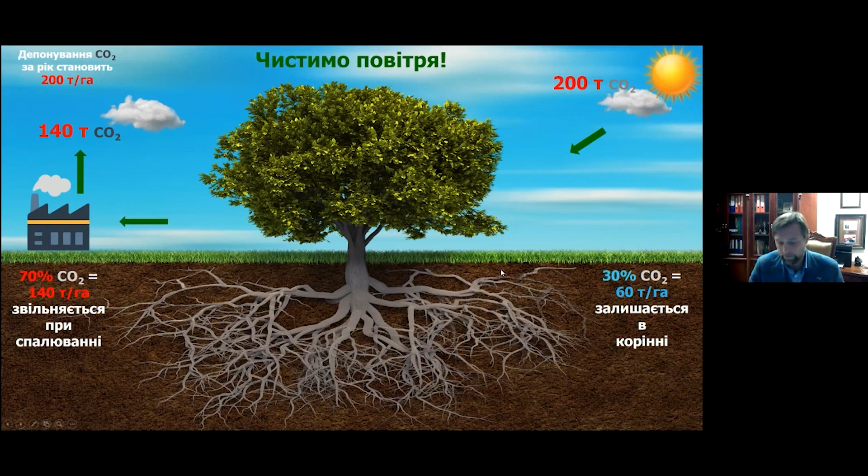This is the way it's going to work. Per kilometer of road per year, it will intake 200 tons of CO2 emissions from that kilometer of road. You cut the top of the trees, and these trees will regrow again, but you can use the trees for fuel. With regard to CO2 emissions, we have calculated that out of 1,000 kilometers of roads, 80,000 tons of CO2 emissions per year can be compensated.

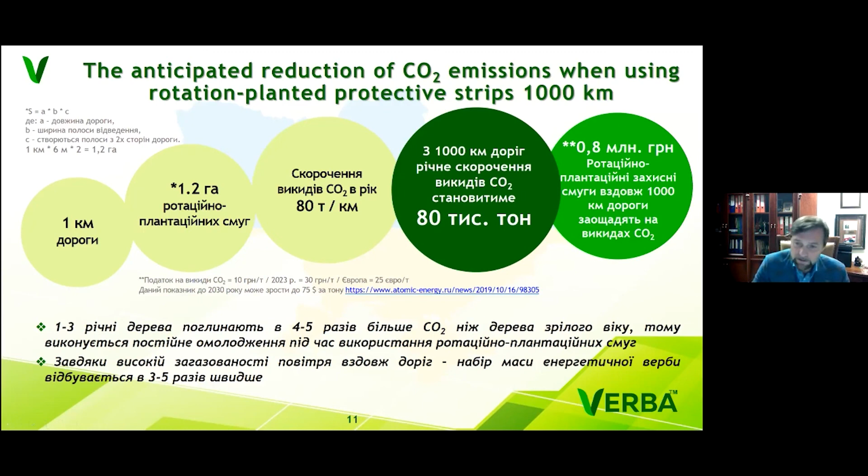This is a lot. Since Ukraine is part of the Green Deal program, we are obligated to cut our CO2 emissions. So these trees, since every 3 years they're being cut totally and then regrow again, will be able to process 4 to 5 times more CO2 than older plants.

So 10 kilometers of road, meaning village roads with the minimum width planted on both sides, will be able to provide fuel for a school of 15,000 square meters for a year.

So this is energy trees. That was very interesting. Thank you very much, Leonid.

For the daily inspection, it was 2 double cabin Gazelle vehicles and 3 machines. 3 machines for the engineers and 2 double cabin Gazelle for the workers. They worked only for the accidents and daily inspection.